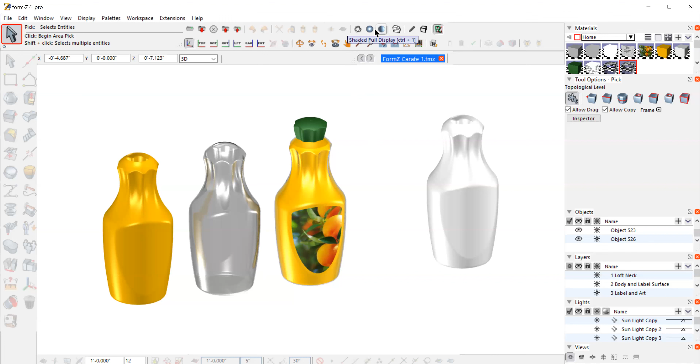Okay, let's turn this back into line. I'm going to work in line view from the front. Let's just look at the bottle. So this is our bottle, our geometry. It is a surface, a front and back surface.

What we need to do is offset it. You go to your derive tool, derive tool section, and we're going to go to offset. Offset, like I used once before, will give us this object set at a certain distance, smaller or larger.

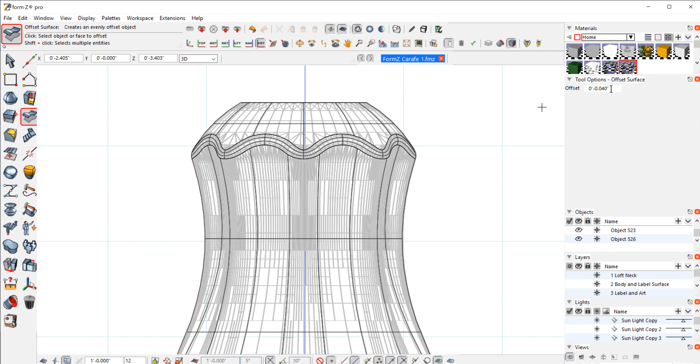I'm going to make the juice 40 thousandths of an inch less than this outside object. So we'll set that now. For some reason this one's going backwards - it's at positive 40, but it's offsetting in a negative fashion. We'll click on this and see how far that comes in. You can see the orange illuminated object is offset inside of this ghosted object, at a distance of 40 thousandths.

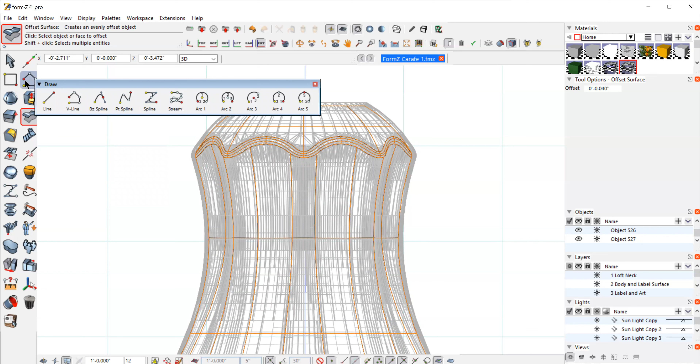So this is going to represent the juice. What I want to do is slice off the top a little bit. I'm just going to take a line about here, and make that a little bit lower. About there - so this is going to be my fill line.

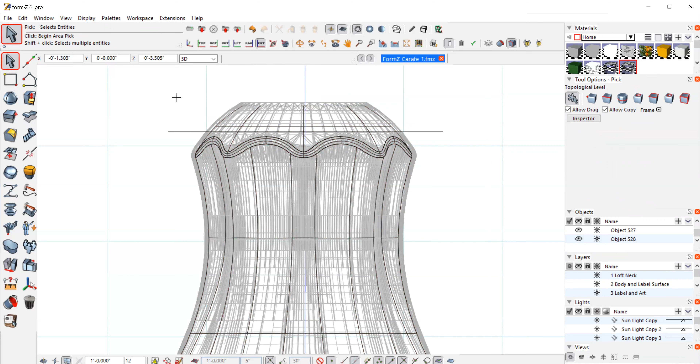This inside piece is going to be the actual geometry of the juice, so when I render this I want to see a fill line below the lip, the top lip of the bottle. I'm going to trim split this like we've done before - trim split with line, and we'll do stitch so we can have a top to this.

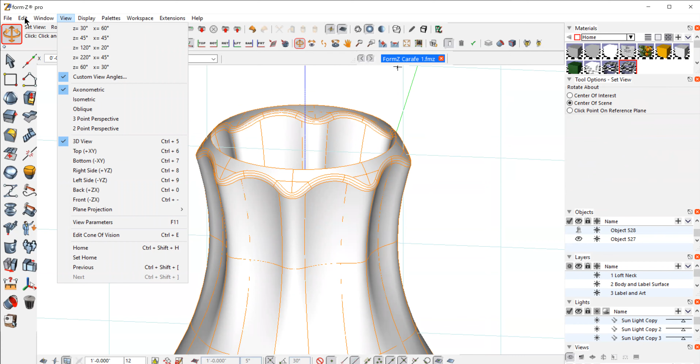So we'll grab the object and trim split. Now I have that set - oops, it didn't stitch. Why didn't it do that? Okay, trim split stitch - I didn't have it selected. Sorry, select that, trim split.

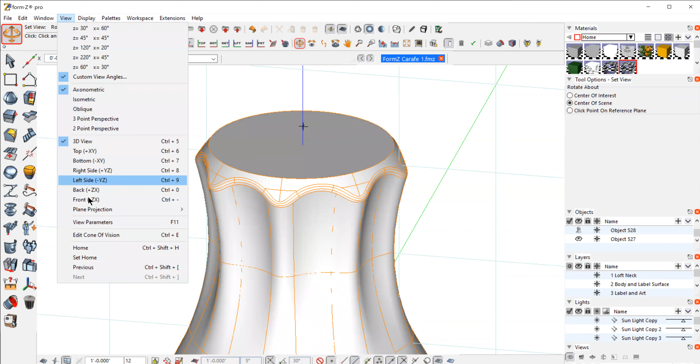That should be closed now. Okay, so it's good. Let's go back to our front view. So that will be our juice, our geometry, and we know that is now 40 thousandths of an inch inside of the shape. So what we want to do is unghost the outer shape that we started with, which is right here.

This is going to be the plastic PET part. So we're going to select that. I want to make that have a wall thickness, a very thin wall thickness, so it will render correctly. If I go to the derive tool section and go to thicken - thicken refers to making a wall inside of this object. Normally I would use a negative number to make it go in, but for some reason this is offsetting in the opposite direction, so I'm putting a positive number of 30 thousandths.

That will make a wall thickness that comes inside, but it won't touch the juice. The juice is 40 thousandths, so we have 10 thousandths of clearance. If I make the juice geometry touch the thickness of this wall for the PET, it will affect the color of the PET. It's what really happens in physics - when you pour juice into a glass, it makes the glass the color of that juice inside. So that happens here, it's like a reality that's occurring. We want to make sure they don't touch. I hope everybody follows that.

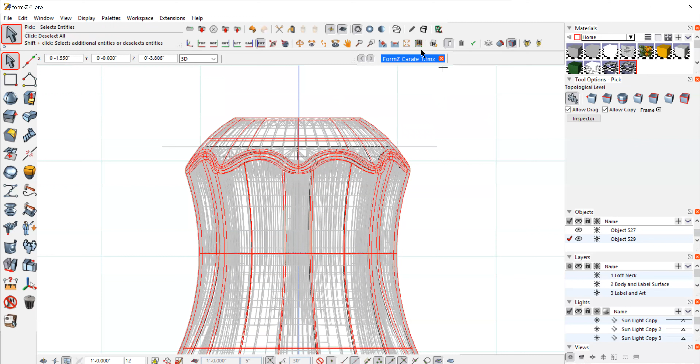So I'm going to click on this now, and make a thickness for this object for our clear plastic part. I'll show you the tolerance. So now that orange illuminated part, I will select it, and move in very close here to this corner. That part that is red, that wall thickness, that's the plastic PET part, and you can see the difference here in this wall.

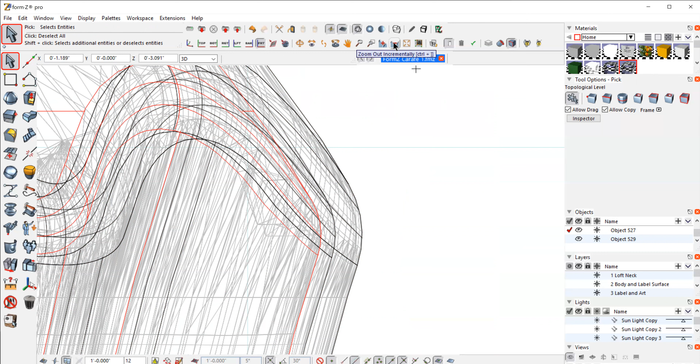I'm going to select the juice part on the inside right there. That little distance from there to there is 10 thousandths - a very, very small amount, but enough to get our effect. We do not want that to touch, so we definitely have a piece of plastic outside of that orange component.

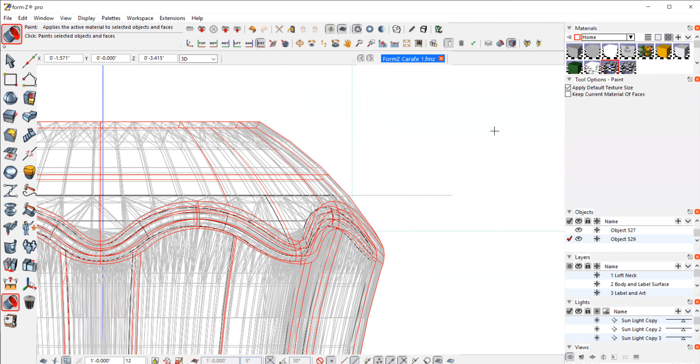So what we want to do now is give color and materiality to these two different parts. Let's select the outside part, which is here. I have set up a plastic clear material - here they refer to it as glass acrylic - and I'll show you what I did with that. I'm going to color that outside piece with that material. Can't see it yet, but we will in a moment.

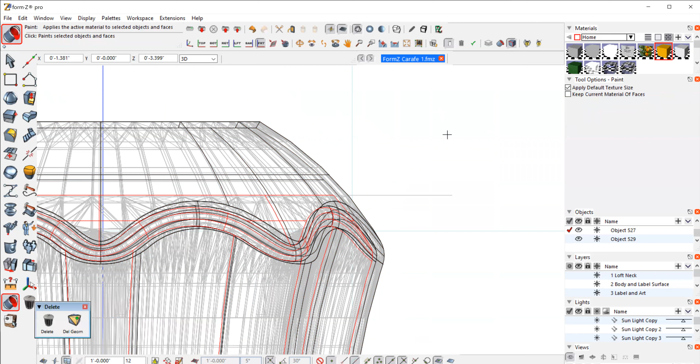I'm going to select the inside part that has that trim line, and select that with our color. So let's just take a quick look at these two parts inside one another. Okay, so it's starting to happen. It's not there yet, but it will be soon.

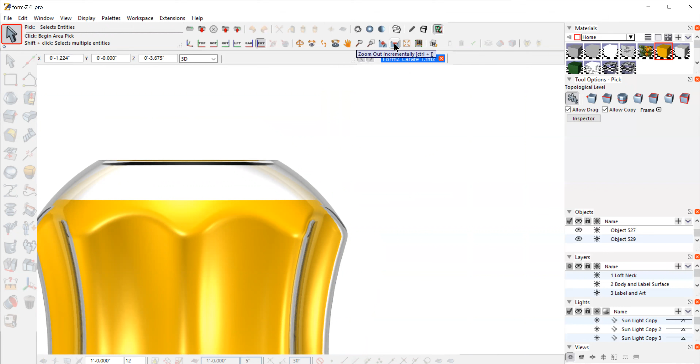Another thing I'm going to do while I'm here is select this piece of geometry, which is our plastic piece. I want that juice to really shine through - I don't want it to be obstructed by any shadows. In Form Z, even if it's a clear part, it will calculate a shadow as the light passes through this plastic part into the center, into the orange.

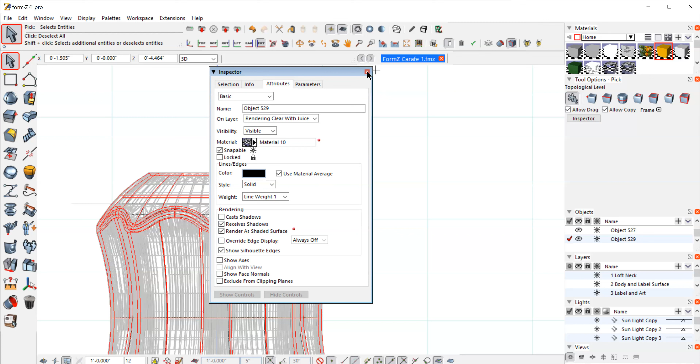I don't want that shadow, so I'm allowed to control those attributes. Selecting this plastic part, we can go under Inspector, to Attributes, and under Rendering, all these are selected - it casts shadows, receives shadows, renders as a surface, and so on. I am going to deselect Cast Shadows, so now that object will not cast a shadow. I'm just setting that up for our rendering phase.

So those two parts are ready. What we are missing - and I have it over here on this other part that I had set up already - is the label. So I'm going to select the label, and I'm going to select the cap.

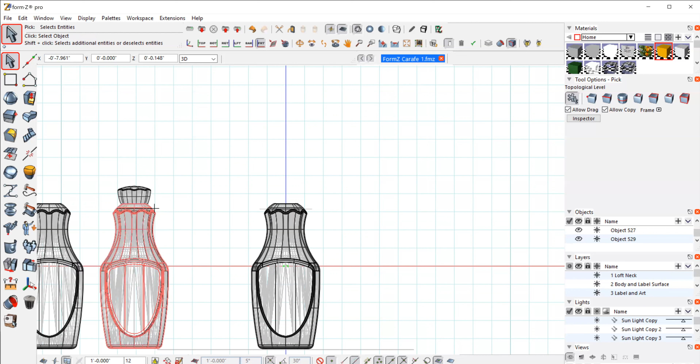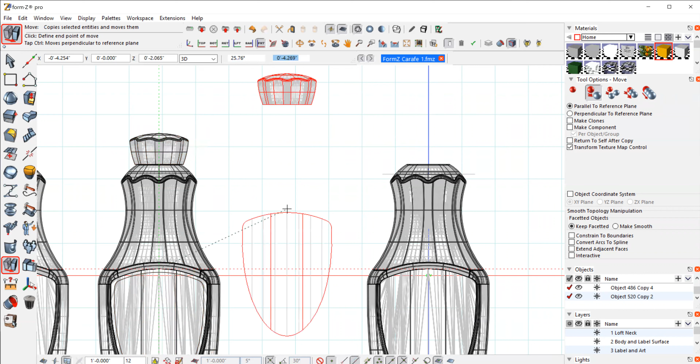Let's just move in here, make sure I'm going to be accurate, and I'm going to bring those on center. I'll bring a copy, can't hurt. I'm going to select the middle of the bottle right on that ridge, right above the label, and I'm going to select that point. It's snapping to there, and I'm going to bring these two over onto this bottle that we just made.

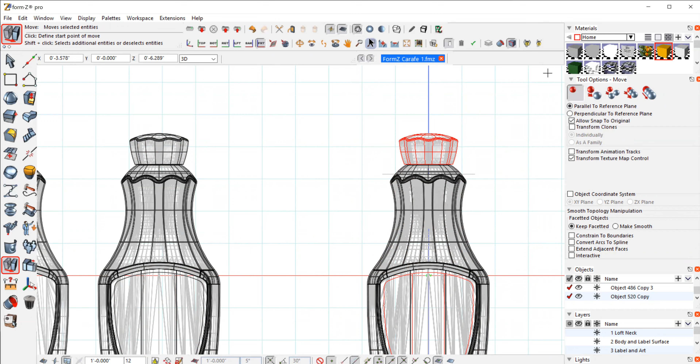So I'm snapping - it's not quite there. It looks a little crooked. I don't think that quite snapped correctly, so I'm going to move that over a little. Okay, I think that should do it.

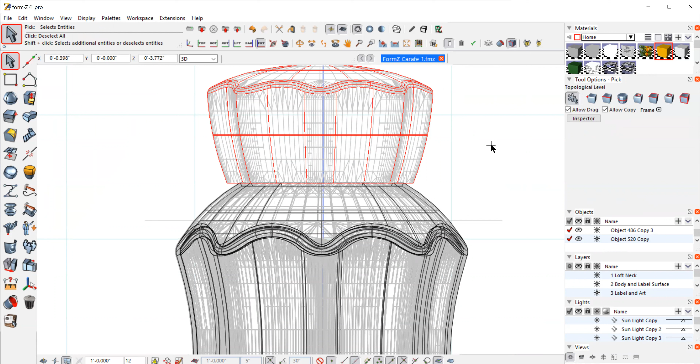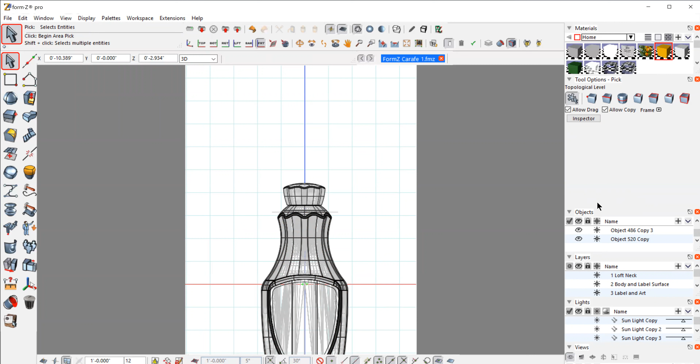So by setting up all this geometry, okay, that looks good. We can then render - that's all we need to do as far as building to get ready for this. So let's go back to our display options. Just like we did for the polyethylene opaque bottle, we had the 8.5 by 11, so that's ready and set up, and that size will work with our view. I'm going to click on our view.

Okay, so the reason this is working so nicely right out of the gate is because I have the lights set up - I set up all those lights when I did the polyethylene bottle. Normally, when I do two different finishes like this, a solid polyethylene and then a clear PET, I often will start a whole other layer, a whole other file actually. I would save this out and rename it because most of the time the lighting doesn't work for both - sometimes the lighting has to be done differently to show a clear object versus an opaque object. I tried to do this in the same lighting sequence and it worked fine.

So I'm leaving my lighting exactly the same as when I did the polyethylene opaque bottle. I'm just changing these materials and it turned out to work pretty well, so that's the reason I can get away with this. So we'll talk about the lighting again.

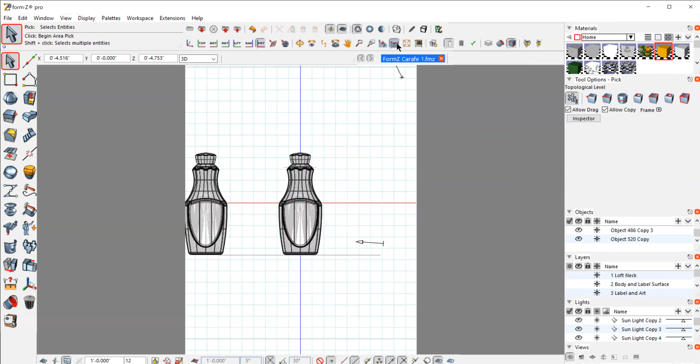So under our lights, I'm going to bring those up. They are illuminated - I just had them ghosted so we couldn't see them in our environment. So we have all these other bottles here that are not part of the rendering, so when I put our point of view in, we won't see those, but we can see our arrows for our different lights.

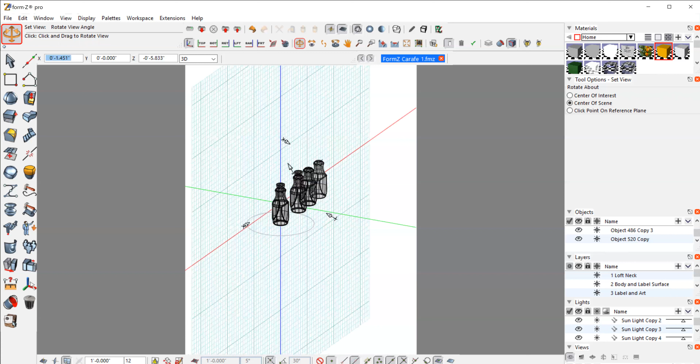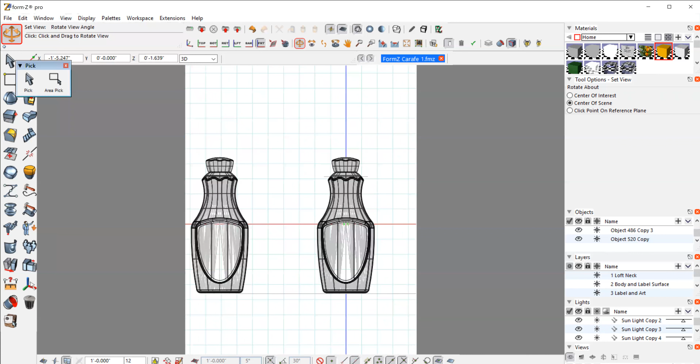So I have 4 of them now, and I've moved them around. I did that during the polyethylene rendering tutorial. So one of the extra lights that I did add was this one right here in the front - wanted to illuminate that front edge. It's this one right here - wanted to get light right on that front edge by the label because that was looking kind of flat before.

So this is a time-consuming process. You have to move the lights around and then go to our point of view and then render and check, back and forth - it takes some time. So every object is going to be different, so this just requires patience.

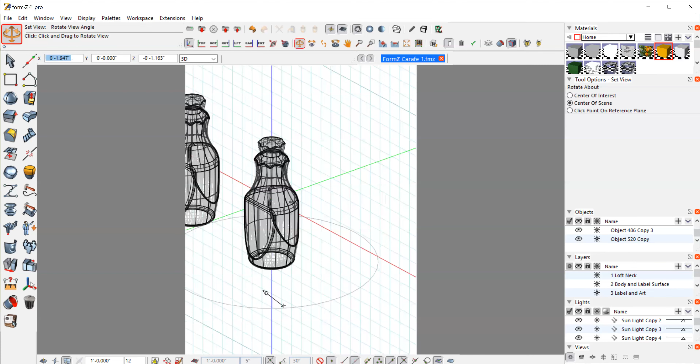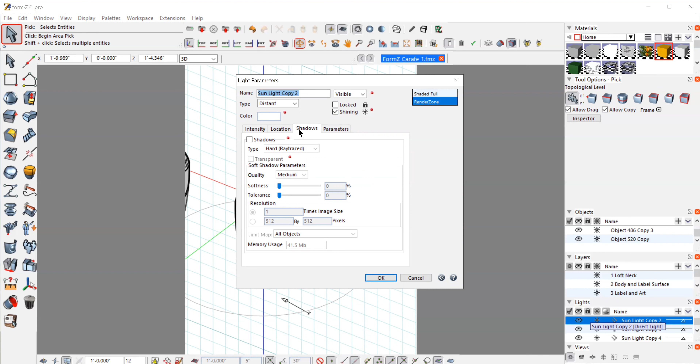These arrows represent the lights, and we can go into each one of these lights - double click on the light. And like when we set these up in the very beginning, we had a brightness and shadows. In this particular one, I turned all the shadows off except for that one light source that I had up at the top, and the intensity I varied depending on what I was doing.

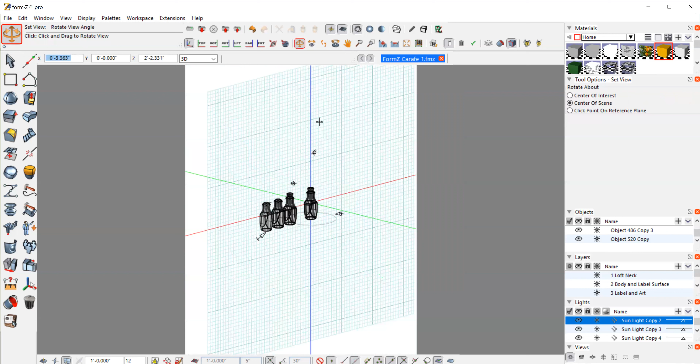Okay, let's see, got 1, 2, 3, 4. Yeah, okay. So if we go back to our views, we select our point of view.

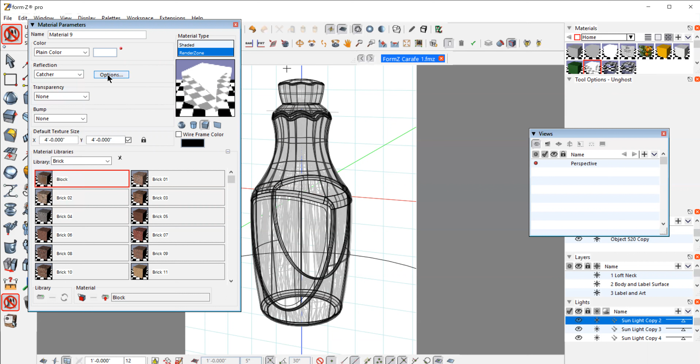There's one thing I didn't mention that I had done last time, which was this surface here that creates this reflection. I have this circle, which is just a 2D, two-dimensional surface. The key is the materials on that. So if you go into reflection, there's one called Catcher. All it does is it doesn't show any kind of object color. It only reveals shadow intensity and reflectivity.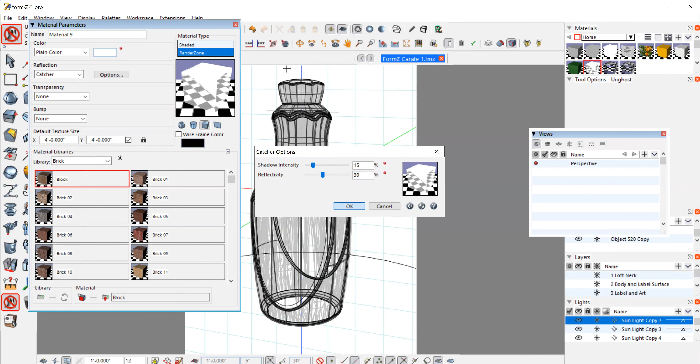And I can show you what that does. I have this set relatively low. You can vary these—you can make very intense shadows, or you can make them very subtle. So when we click on Render Zone, it is rendering that clear plastic part on the outside of the juice area, and then I have this reflective quality. That is a little bit too strong for me. I have a subtle little shadow, so I'm going to back off on that.

So if I go back up to our Catcher options, reflectivity, I have that pretty strong—it's a little bit too much. So let's go about here. Okay, it's a little lighter. I'm actually going to go into Photoshop and soften it. That shadow looks a little bit too light, so let's go back and adjust that.

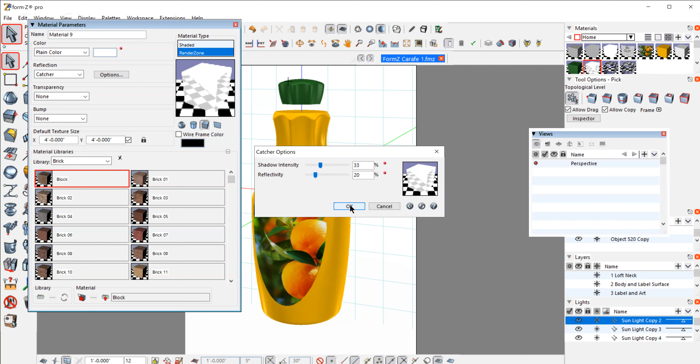Catcher, shadow intensity—let's put that up maybe around 33. Okay, so a little bit more with the shadow. And like I said, I'm going to go back and feather that reflection out a little bit, so I just want to see a little bit of it.

So that's it, this is the combination of all these efforts. Obviously we built our geometry, we made that nice and clean, we brought in our label art, we set up our perspective, our point of view, our display image size. And then once we got here, we did our materiality with the different parts that are in here, and we adjusted those lights. So a combination of all of these things together allows this to happen.

One little thing I haven't mentioned is another shadow effect that I took away. This cap, I eliminated the shadow. I'll show you what it looks like with the shadow on. So we can go into our inspector, and under attributes, you have shadows off. I'm going to put them back on, and you'll see what happens.

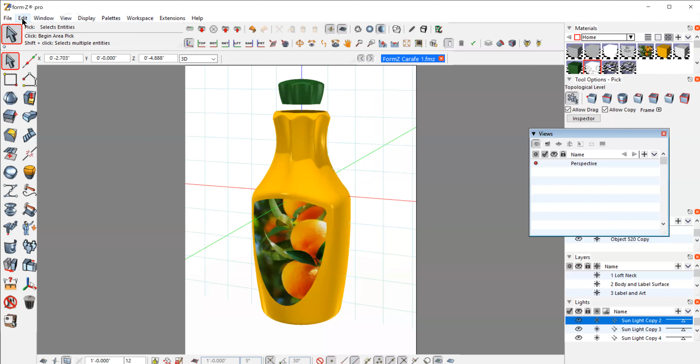It's pretty subtle, but it made the very top surface of the juice quite dark, so I wanted to eliminate that. The actual bottle is not casting any shadow, so that didn't affect it, but it was quite subtle. So I'm just going to undo—see, you can see it right here, how it changed that shadow.

So there are many ways to do this, you can play with this. I was happy with the level of highlights—it wasn't too overwhelming. I'm getting a little detail highlight on this edge of this label area, and then I got the bounce lighting on the bottom, very similar to what I had in the polyethylene, because it is the same lighting that I used.

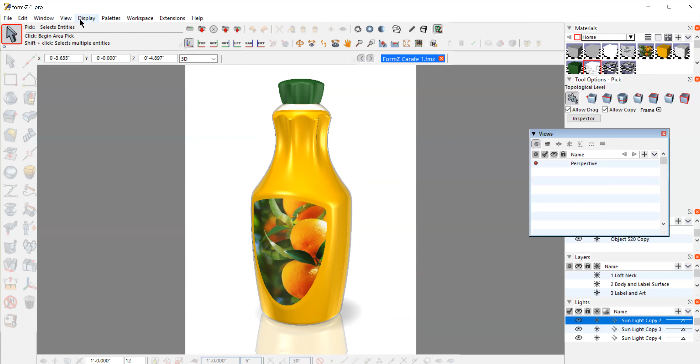So I could save this out as a JPEG, which I have done already—I have it saved. So under display options, I'm going to go to the Render Zone area, and I'm going to do this background, which I had done last time. Again, there's lots of ways of doing a background—you can bring in maps, you can bring in environments and put that in there, you can set this into environment just by loading them in this area. So you can do all that in Form Z.

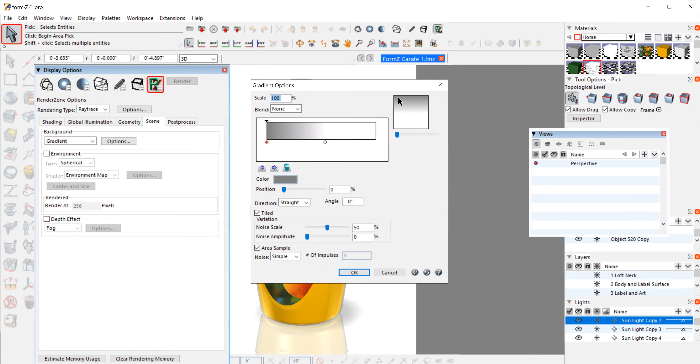What I use is this gradient. Under there I have a subtle gray to white—it looks like this, set up on this horizontal orientation. So, okay, and I am going to do this automatic. I'm going to render this right here.

So this can be quite effective, especially depending on what you're buying. Even this nice clear area looks good with that gray behind it, so it really gives a nice feeling there. I love doing this grayed out—it's just a very subtle, almost like a seamless background in a photo studio. I used to do them in black and put patterns, a whole bunch of things there. I've come to the conclusion over time that it gets a little distracting. This works pretty well, but it is a background.

So when you trim this out or put this on a page in other presentations, like a PowerPoint or a PDF, and combine it with other things, the background kind of gets in the way. So I usually like to have it without a background, and I can trim it and have it independent by itself, and use that image. So both of them work. Okay, so that's rendering bottle 3 as a clear PET bottle.